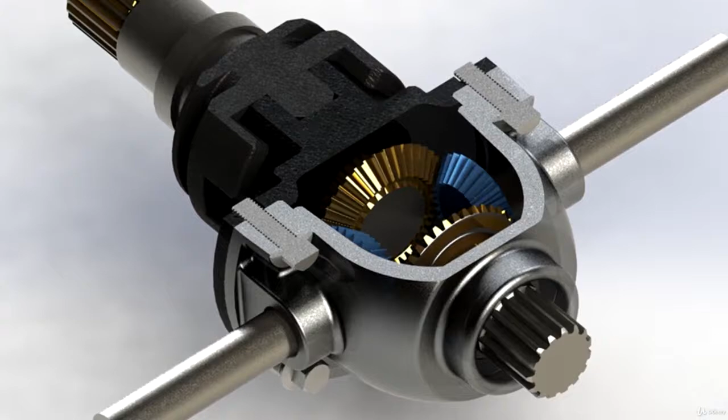This is the last video of the differential gearbox and we are going to do the assembly of all the parts that we created to build our differential system. This is the picture of the differential system and let's try to make it with Solidworks. So let's begin by creating a new file and let's make it an assembly.

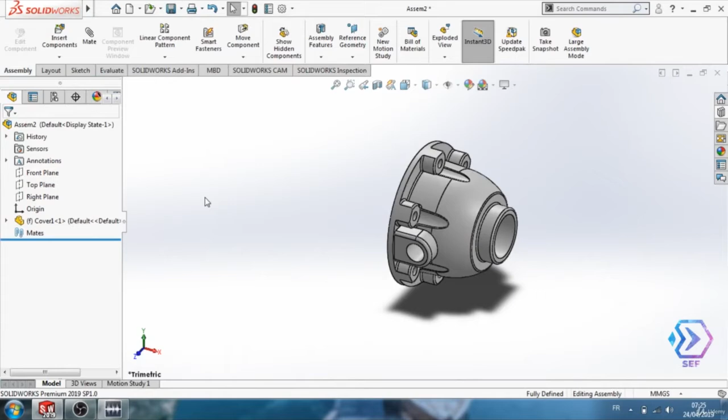They will ask you to add the first component of your system and I'm going to select the first cover. Let's put it somewhere here. Now I'm going to add the other components of my differential system. So click on the assembly here, insert component and click on the second cover. Let's put it somewhere here.

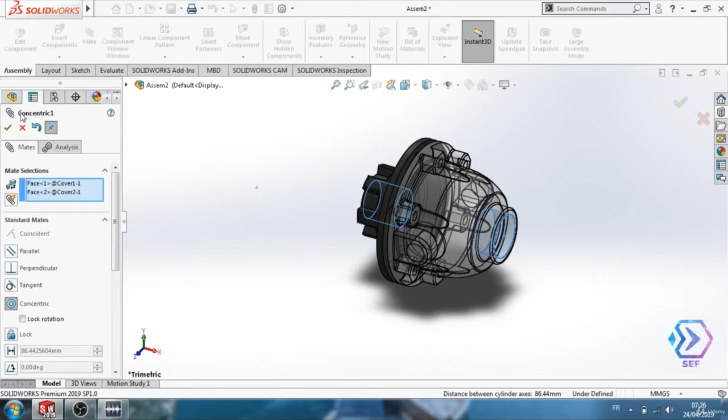And let's begin our mate settings. So I'm going to select this cylinder and this one, click on mate and they will give you the concentric mate. Click OK. Now I'm going to separate these two parts to work on each one of them separately.

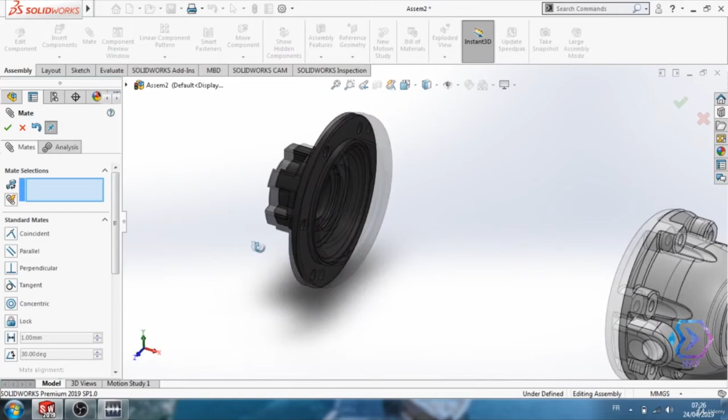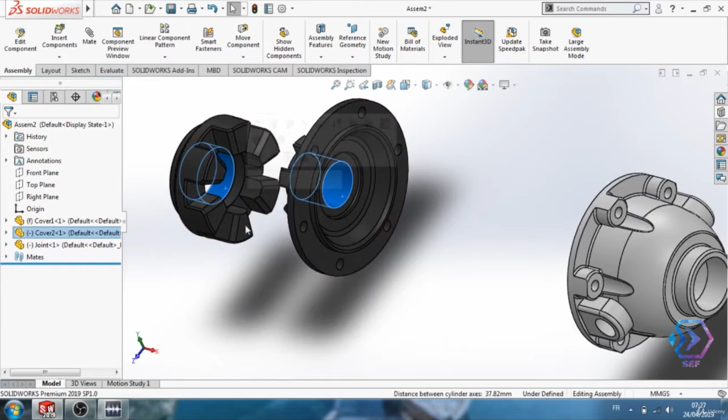So I'm going to begin with the second cover and let's insert the components that will be fixed to the second cover. So the first component will be the joint. I'm going to insert my joint. Let's rotate this component about Z. I'm going to do the same thing. I'm going to select this cylinder, this one, click on mate. They will give me the concentric mate. Okay.

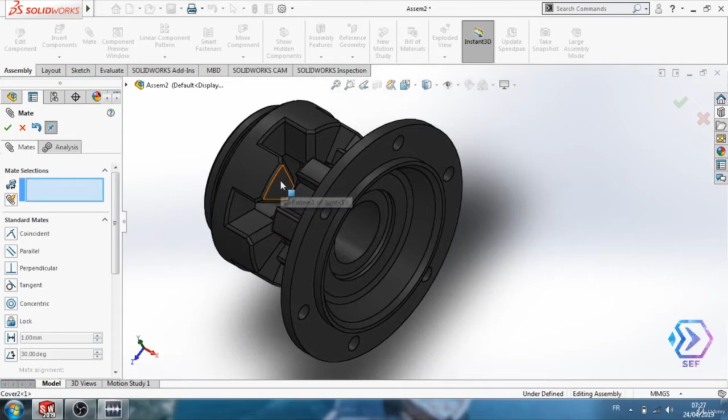Second mate that we need is this face. Rotate this one, click OK. The third one will be this face with this one, and here we have the joint fixed to the cover. So now if we try to rotate the joint, you can see that we have also the cover rotating.

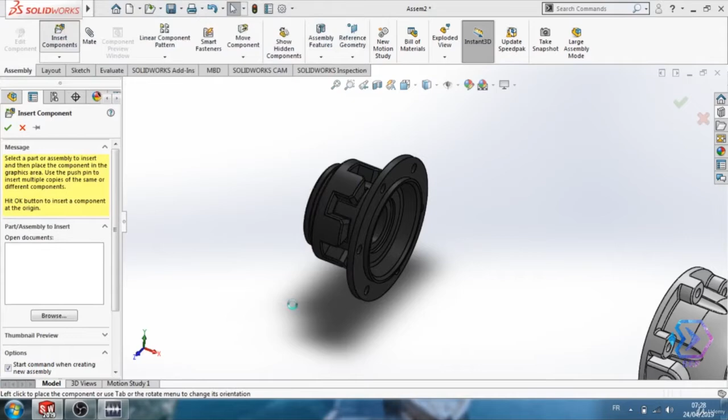The other thing that will be with the second cover is the shaft. So I'm going to insert my shaft here, open, let's put it somewhere. Good. I'm going to select this cylinder with this one to give the concentric mate. Click on mate. Okay, so the part that will be fixed to the shaft will be the first gear. So I'm going to insert my first gear.

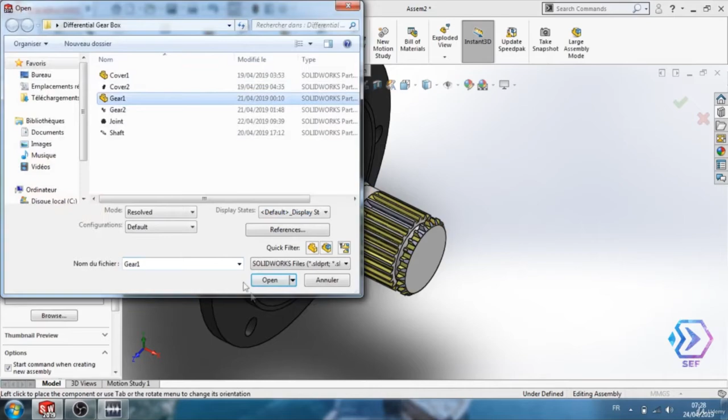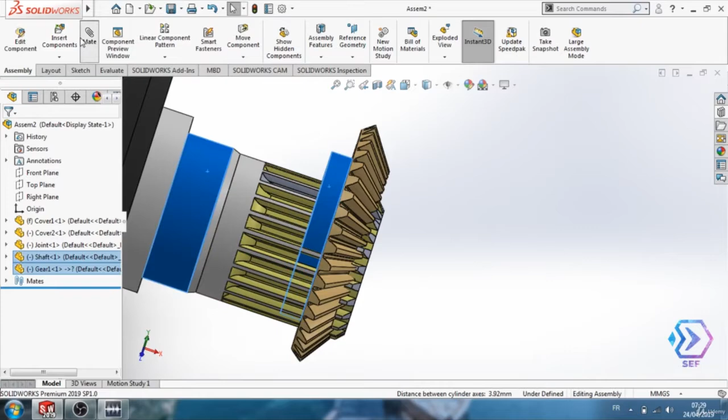Now I'm going to select this face. Let's rotate this face and click on mate. They will give me the coincident mate. Good. Now I'm going to select the cylinder and this one, click on mate and they will give me the concentric mate again. Click OK. Good. Now we have the gear fixed to the shaft. If we zoom in, you can see that the teeth are now in the best position with the gear.

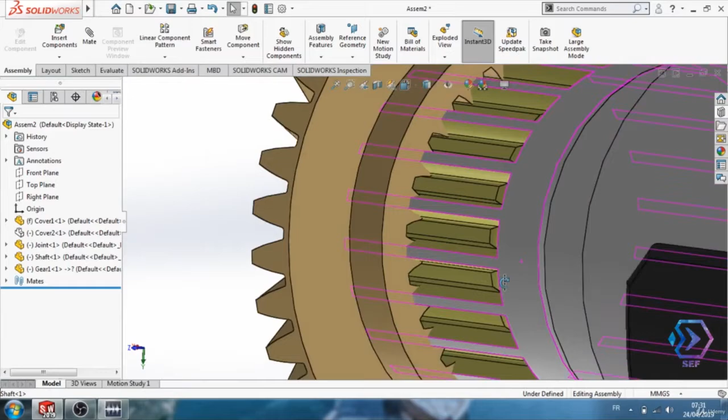Now let's zoom in. I'm going to select this face. Let's hide the second cover. Click on this one and click on hide component. Good. Now I'm going to select this face. And I'm going to select this face to give the coincident mate. Now we have the teeth fixed to the gear.

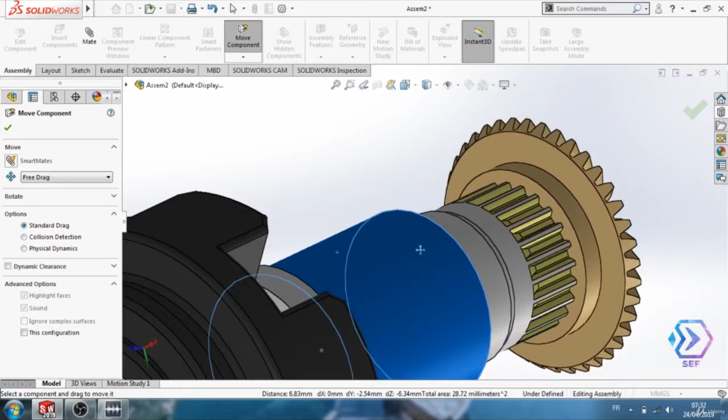So now if we try to move or if we try to rotate our shaft, you can see that the gear also rotates with the shaft. Good. Click OK. Let's show our second cover. Show component. Good. Now we just finished with the second cover.

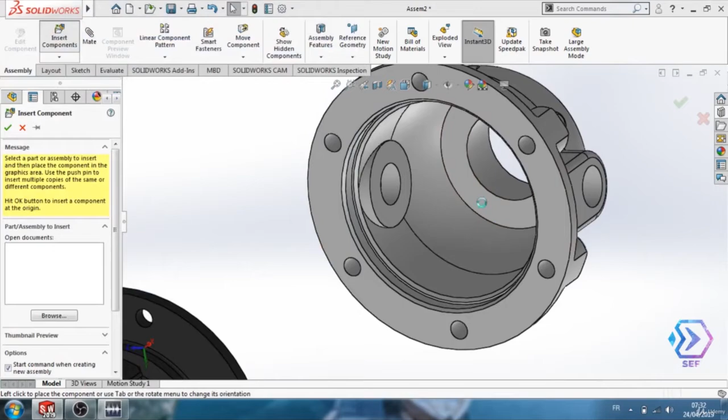Now I'm going to work on the first cover. So let's zoom in and I'll insert my components. The first component is the second gear. Let's put it somewhere here. I'll select this cylinder with this one to give the concentric mate. Let's switch direction by clicking on flip mate alignment. Then click OK.

Now if we go back to our differential system, you can see that we have another two gears that we didn't create. I didn't create these two gears because I already have them in the Solidworks library. So I'm going to click on the toolbox, scroll down, ISO file, power transmission, gears, and select the straight bevel gear.

Now, as you can see, I have the same bevel gear needed on the differential system because the last time I used Solidworks, I used this gear. So normally for you, they will show you the first gear that we created. So we need to configure your component.

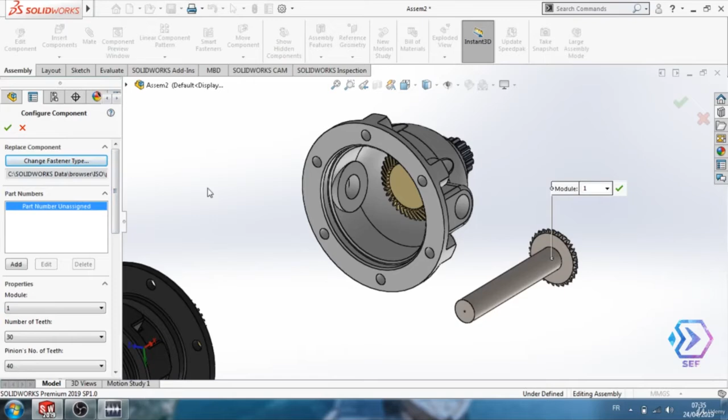So scroll down here, make sure the number of teeth is 30, the pinion's number of teeth should be 40, the pressure angle, keep it on 20, the face width should be 8, the hub diameter should be 13, and the mounting distance should be 100. Then click OK. They will ask me to add another one, so I will do it because we need to. Then I will click on cancel.

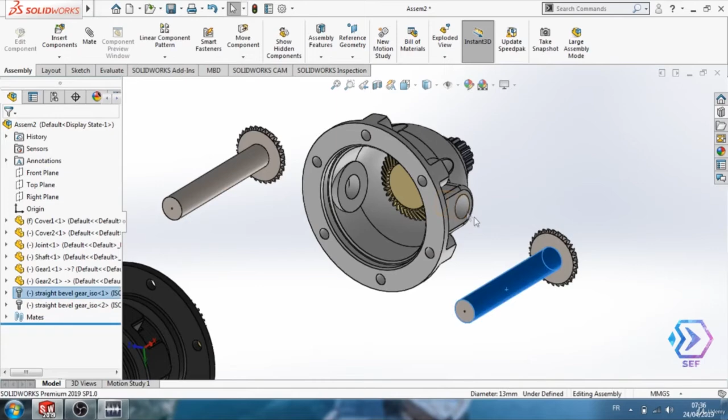Perfect. Now I'm going to select this cylinder with this one and then click on mate. Let's flip the mate alignment by clicking on this icon. Perfect. Click OK. I'm going to drag this one here. Good. Now we have the first two gears inside the first cover.

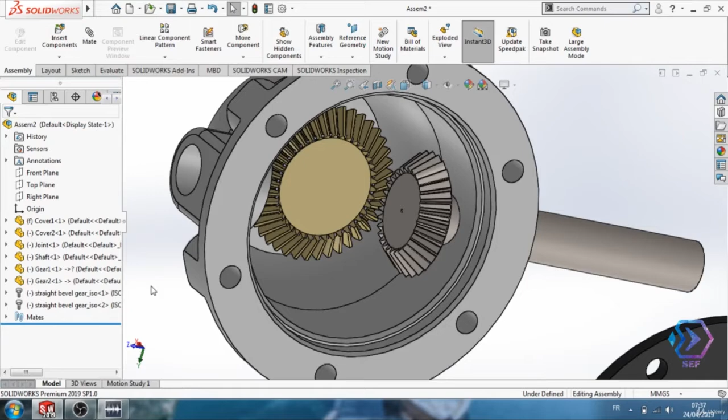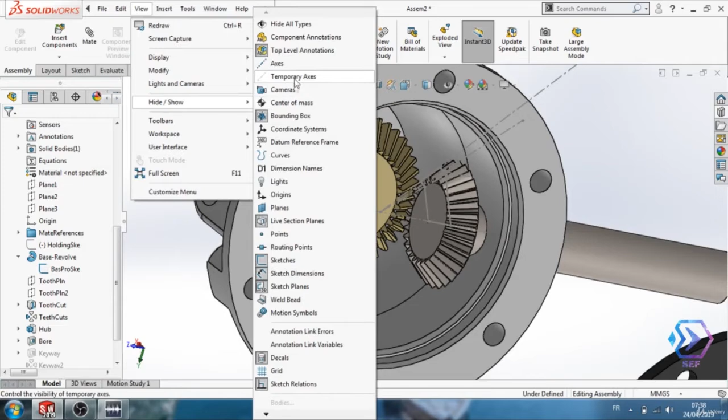Now I'm going to add the gear mate between these two gears, but before doing that, I'm going to select the first gear here, click on it, scroll down, search for the base revolve, then click on this sketch and click on show. Now we have the form of our sketch created. Now let's go on view, show, and let's show the temporary axes.

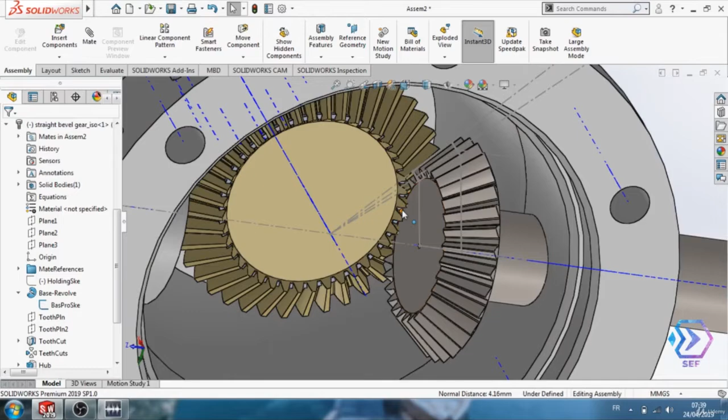So I need this point to be on this axis, on this blue axis. So let's click on this point, click Control, then click on this axis and click on this coincident mate. Perfect. Now before creating the gear mate, as you can see now, the teeth are not in a good position. So what I'm going to do is move my first gear here, and let's get a better positioning with the teeth.

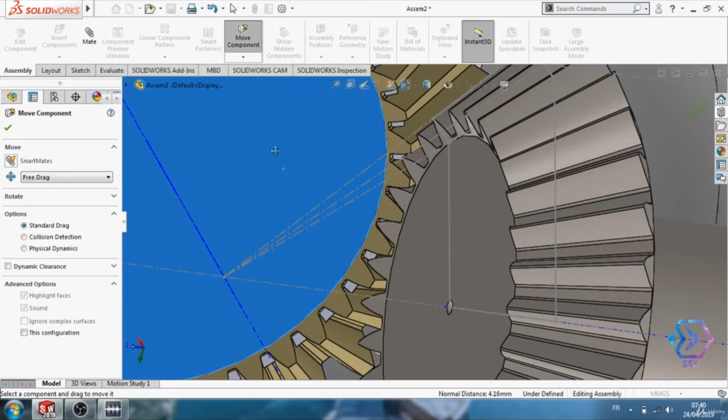Good, click OK. Now we can add the gear mate settings. Click on mate, scroll down to mechanical mates, and click on gear.

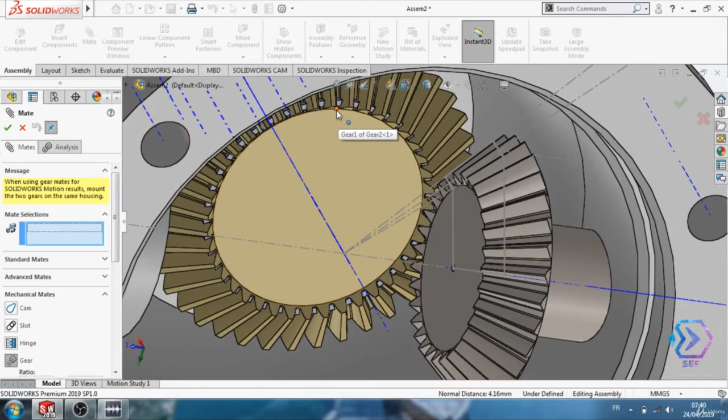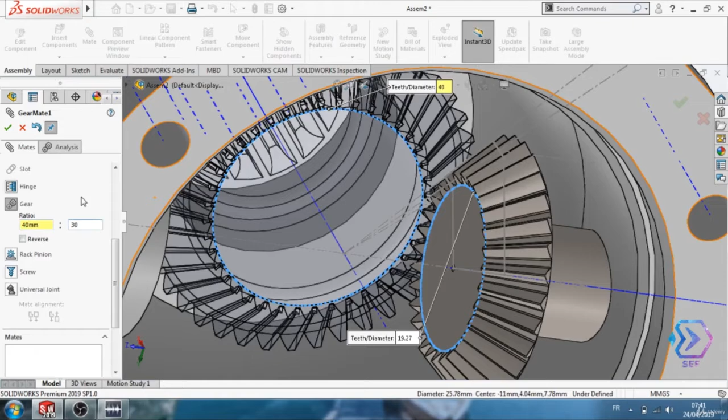Go back and we'll do the mate selections. I'm going to select this circle, not the face, and select the circle here, always beginning with the big gear. Click on this circle, then click on the other one. Scroll down, and the ratio here should be 40 to 30, 40 for the big gear and 30 for the small gear. Click OK, and here we have the gear mates.

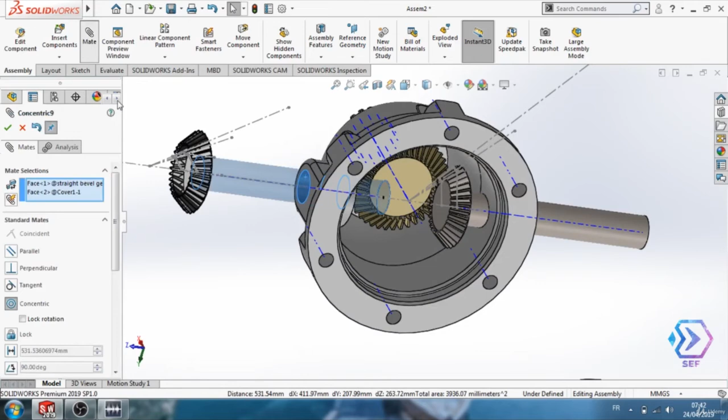Now I'm going to do the same thing with the second gear. Select this cylinder and this one, then click on mate. Let's flip the mate alignment by clicking on this icon. Click OK.

Let's do the same thing. I'm going to select this point and the axis, and they will give me automatically the coincident mate. Click OK.

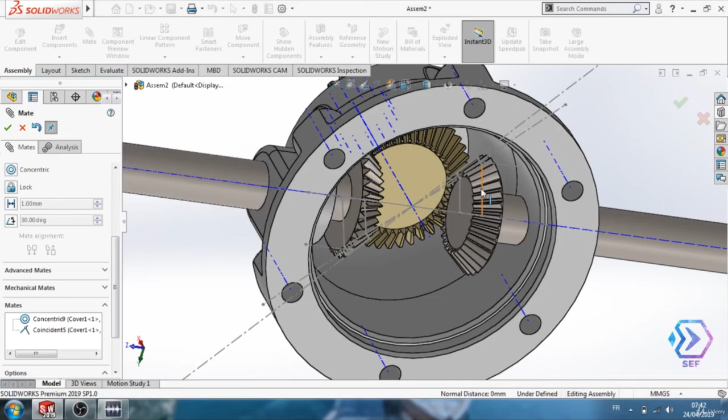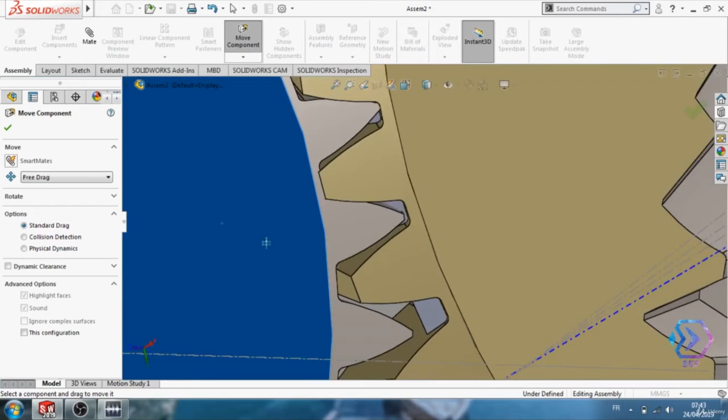Now before adding the mate settings, let's make sure the teeth are in the right position. I'm not going to select the big gear, so I'll move this second small gear to get the positioning I need. Let's zoom in. Good, now we'll add the gear mate.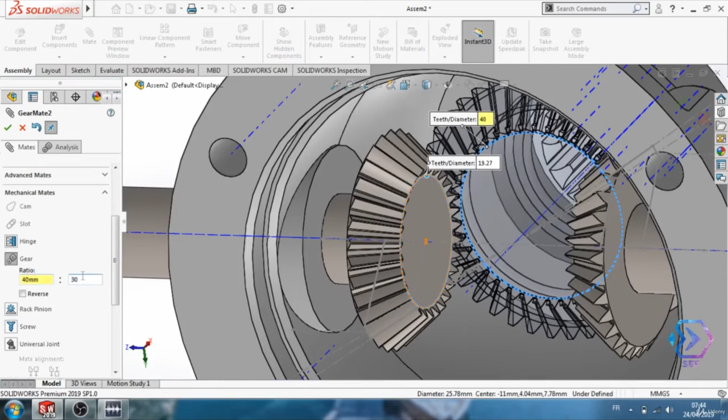Click on mate, scroll down, mechanical mates, gears, select the first circle of the big gear and the second circle of the small gear. The ratio here should be 40 to 30 again. Click OK. Now if we try to move or rotate one of the gears, let's try rotating this one - you can see all the gears rotating together. Perfect, now we have all the parts of our differential gearbox.

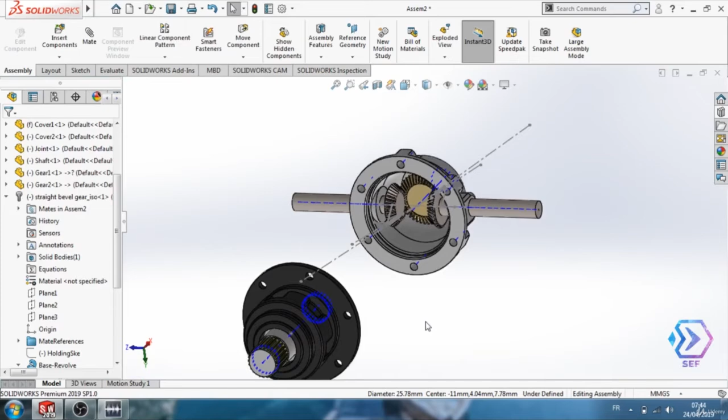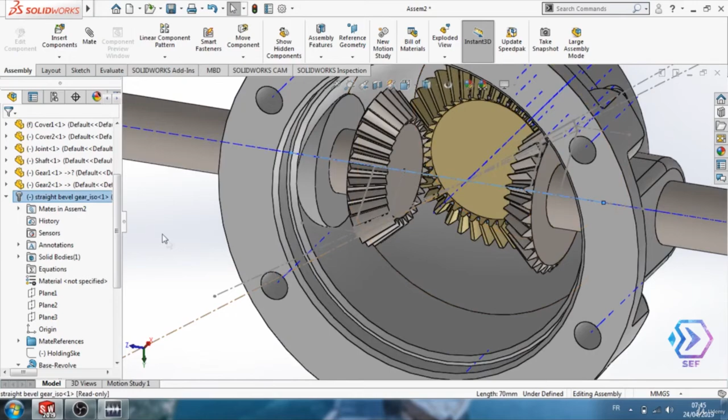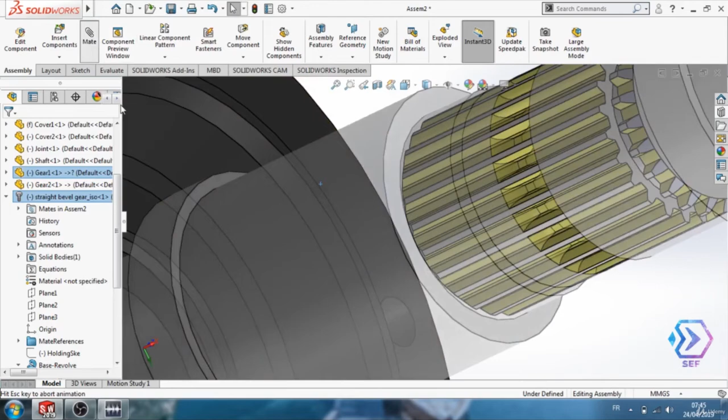Let's rotate our system. Now we can hide the temporary axis, and I'll select this face here. Click on Control, then click on this face. Now click on Mate, and the mate we need is the distance mate, with the distance between them being 11 millimeters. Click OK, so if we zoom out...

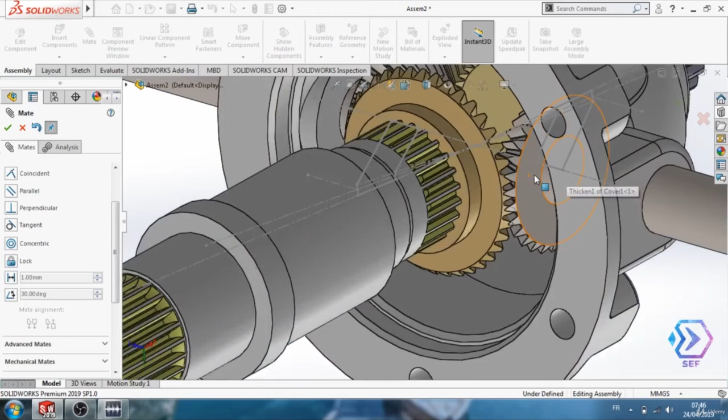You can see that the gears are together. Click OK, and let's move our first gear here to get a good positioning with the teeth, like that. Click OK, and let's begin our mate settings.

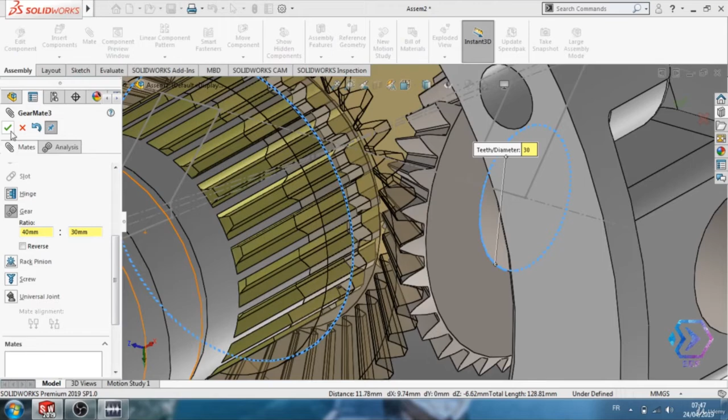First click on the big gear here, on this circle, then click on this circle here, click on mate, scroll down, mechanical mates, gear, the ratio should be 40 to 30 again. Click OK, and here we have the mate settings.

So now if we try to rotate for example this shaft, you can see all the gears rotating together, and this is exactly the differential system. So let's finish our system here.

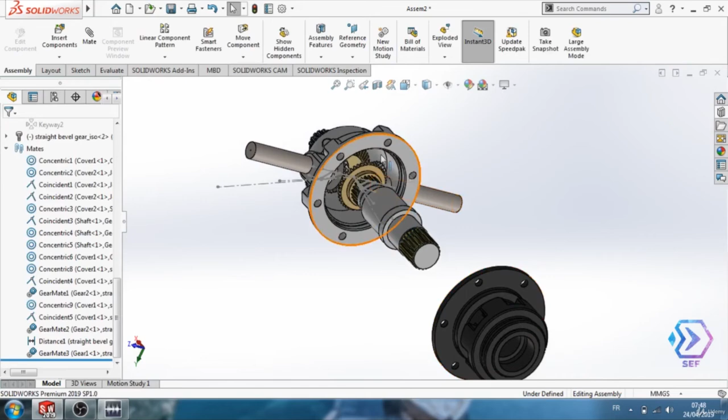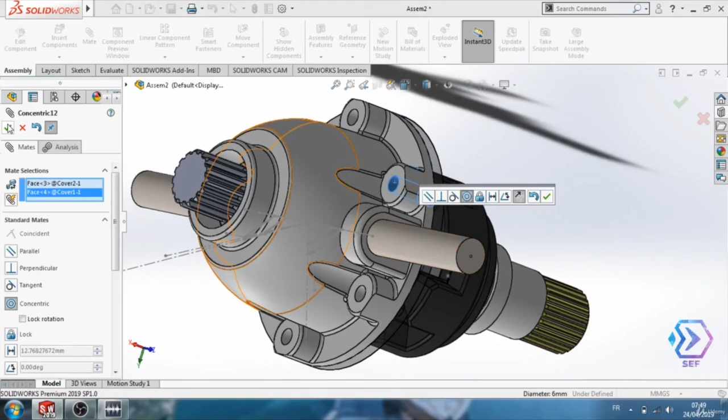Let's put the two covers together. I'll click on this face, rotate, and click on this one, click on mates, but they are not in the position we need. So I'm going to select this cylinder of the hole and this cylinder of the other hole, and they will give me the concentric mate. And there you go, all the pieces of the differential are together.

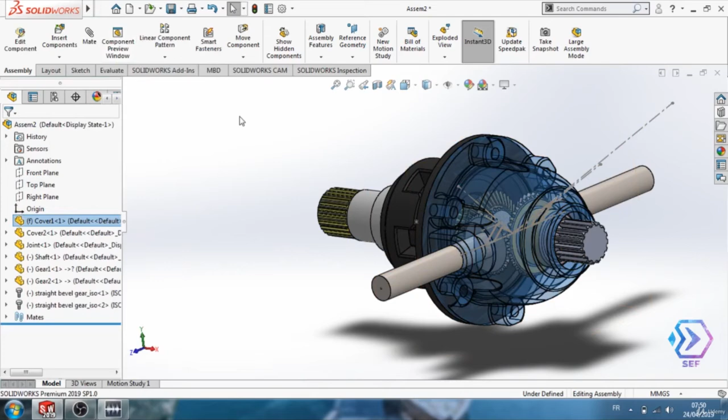Now let's try to rotate the shaft. First, to see the gears inside, click on this cover and then click on change transparency. Good, now we can see the cover and the gears inside. Let's rotate our shaft by clicking on move component. Let's move the shaft - as you can see, the whole system of the differential gearbox is working.

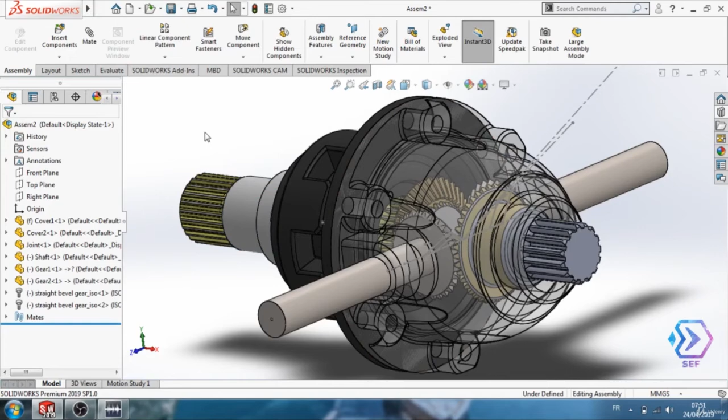Now let's finish by adding screws, hex bolts and screws, and click on the hex bolt ISO 4162. Let's drag it here and wait a second for it to take the form you need on your hole. Click OK. Good, let's change M5 to M6.

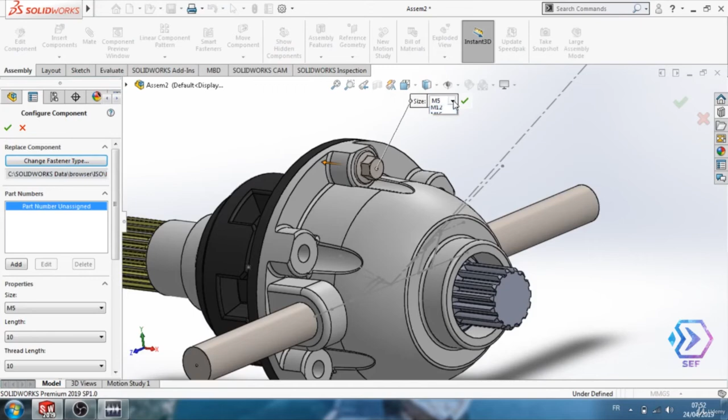Let's rotate this and drag this one like that. Perfect. Click OK, and let's do the same thing on the other parts.

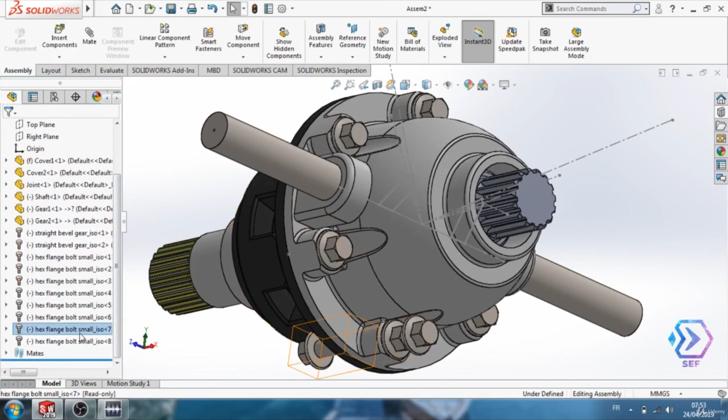Perfect, and finally we have our fourth system ready to use. This differential gearbox is a very good exercise.

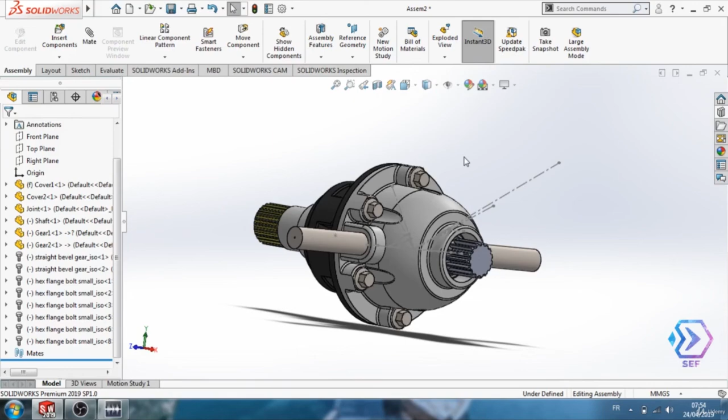First, by creating the parts, we learned how to create a bevel gear, we learned how to create some strange forms, we learned how to create the shaft, and then on the assembly, we used the mates that you can use in gears, and we learned how to put gears together. So I think the differential gearbox is a very good exercise to become a professional user of SolidWorks, and I hope you like it.